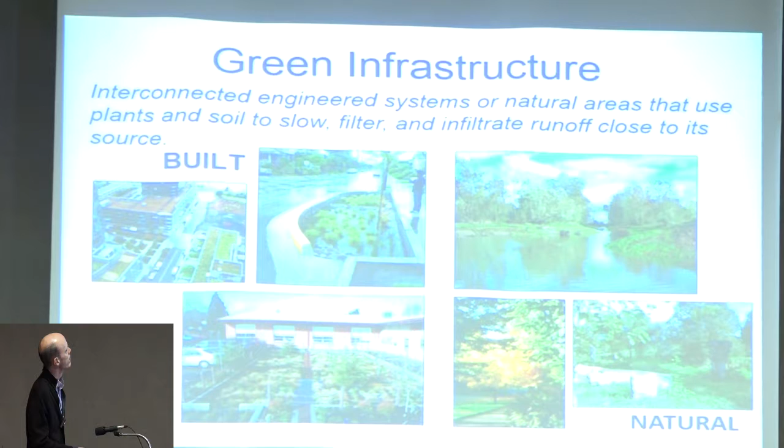Perhaps it's the same for you guys. We talk about green infrastructure partly because we're talking a whole lot more about asset management these days. I think everybody's talking about asset management, and in order to be more transparent with the public, we're listing our assets more. For a long time, we've talked about asset management in terms of our infrastructure, our gray infrastructure at the city, but now we're also bringing green infrastructure into our databases, tracking so-called maintenance needs, performance, and that is a work in progress, but we're doing all that.

And again, we're trying to be a lot more transparent with the public. We've been under, the city of Portland, we've been under a whole lot of scrutiny the last couple of years, and there have been some lawsuits that have really forced us to be more clear with the public about what we've got and what we're doing.

I guess we're a big system. We have 2 wastewater treatment plants, 1,000 miles of sanitary sewer. One thing that's distinctive is we have a whole lot of sumps. We have a huge underground injection permit for in the ground. These are 30-foot vaults in the middle of streets on the east side where the soils drain well, and we have flood deposits. We have a lot of these injection systems. We've been doing that for years. We're actually very lucky that we can do that. It's a very inexpensive way to dispose of stormwater runoff.

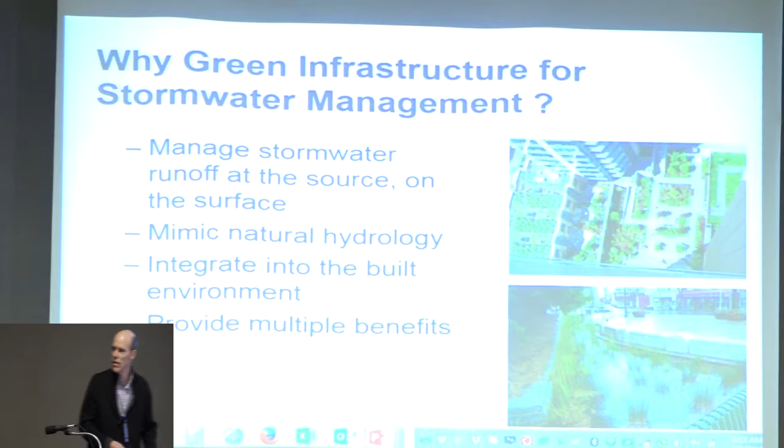Should I just do a page down? What if you do is page down and I'll switch out batteries. Oh, okay, that maybe it's better. Let's see, it's not doing that either. This is fireworks. No, I think you switch between your PowerPoint to your desktop. All of it will show up.

Okay. Thanks. I don't know what you did. What I did.

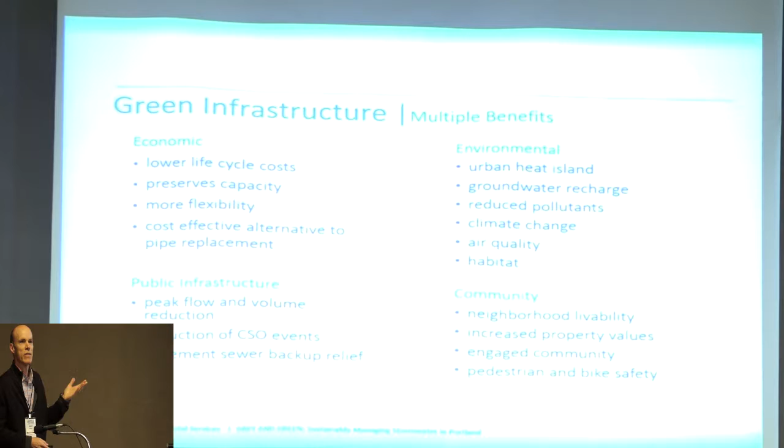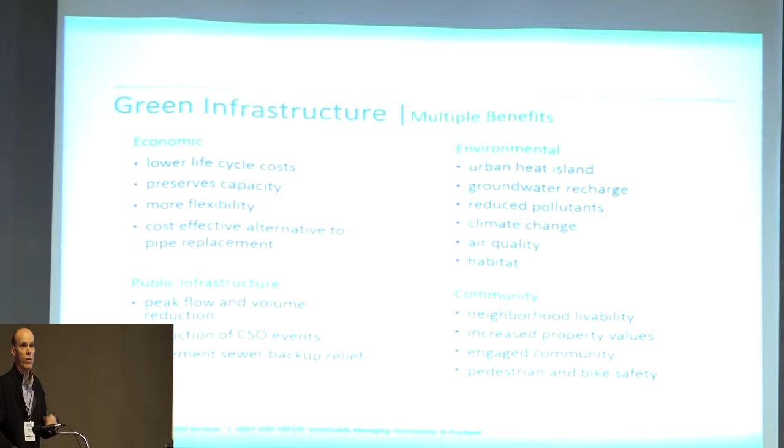So, all the multiple benefits again - there's a whole lot of good reasons to do it, and many of these apply in different cases in different ways. There's a ton of environmental value in addition to economic value. As you'll see, we've used these a lot in Portland to benefit the pipe system, the sewer collection system, extending its life by protecting it from storm surges and avoiding having to dig up pipe that otherwise wouldn't need replacing, by managing the volume going into it.

So are you under consent order to separate the sewers, or are you using green infrastructure to deal with it?

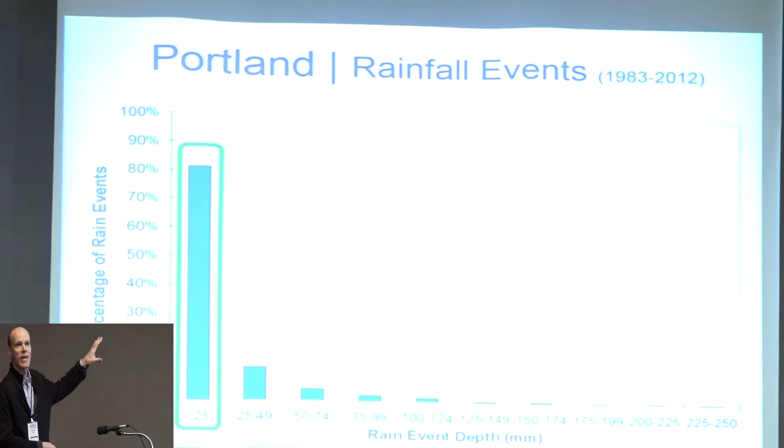So, sorry about that - more millimeters, but we get a lot of really small storm events, low intensity events, mostly in the winter.

So, you guys have crazy big storms, right? I can't imagine what your version of this looks like.

We can't have intense storms, but we have about 32 inches of rain annually, and it varies. We don't get a lot of the teeny tiny storms, but we have a water quality line of 1.25 inches. That's what we try to manage - that's 90% of the rainfall events. Our water quality is 0.84, I think.

So we don't get a whole lot of snow, 8 centimeters a year.

So I think I kind of went through this before. We have 2 treatment plants, 100 pump stations. 42% of the city is served by this old combined sewer system that just got a big upgrade. Operating budget, almost $900 million a year, and I'm one of more than 500 employees - just to give you a sense of how big the utility is. We're a drainage utility, but like other similar utilities, we really push the boundaries.

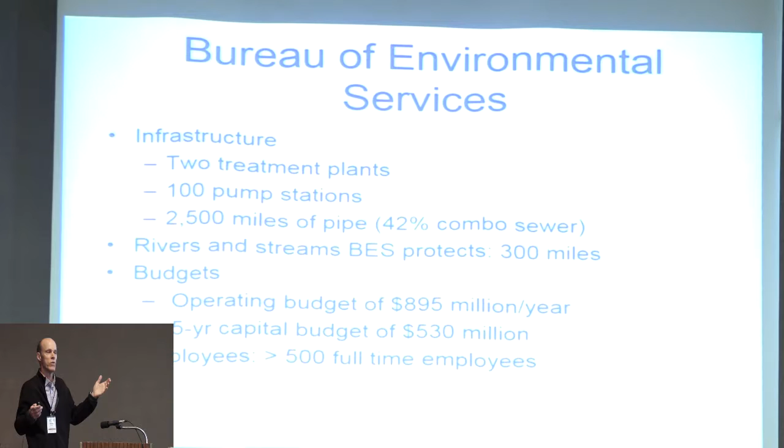In fact, there's been a lawsuit about the scope of our services because the original city charter, which hasn't changed, just refers to us as a drainage utility that handles runoff and sewage. Obviously our scope has changed quite a bit.

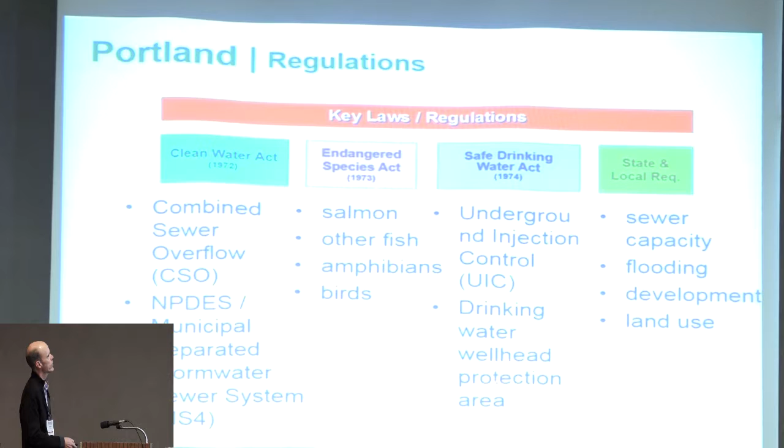List of the regulations we're under - I assume most of these are familiar to you guys. We talked about the combined sewer. Of course, we have an MS4 permit. We have an Endangered Species Act that actually applies within the city of Portland - we have endangered salmon that pass through the city. We have UIC, wellhead protection areas, and then a list of other local and state things.

1991 is when the first legal action came in about the CSO program. Downspout disconnection - I worked on this program. We worked at over 25,000 houses and disconnected over 50,000 downspouts. It was one of the most cost-effective parts of this combined sewer overflow program, getting stormwater out of the sewer system.

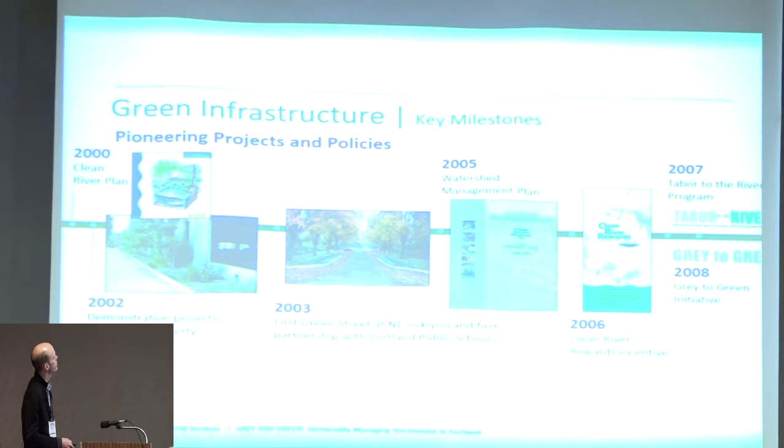We were planned - in 2002, we actually funded, with operating funds, 10 private property retrofit programs. We recruited these projects, we advertised it, we gave people money for managing a certain amount of runoff. I could describe the criteria. We kind of put our money where our mouth was, to learn a lot more about what it would take to do stormwater retrofits, because we'd talked about it for quite a while.

As part of the CSO program, we couldn't just rely on new and redevelopment to get stormwater out of the system. We actually had to work with property owners to retrofit their properties, which is, of course, the most complex, expensive way to do it, to get stormwater management. I'll talk a little more about it.

This was our first Green Street project in 2003 - just 12 years ago, and of course we have over 1,500 of these things now. That's just one version. Watershed Management Plan 2005.

Clean River Rewards, just to talk briefly - we actually have a rate reduction you can get if you manage stormwater on your property. You can get out of a third of the bill, and as you'll see, we have a pretty high bill if you manage all of your runoff on site. That applies to everybody, and 2006 is when that all started.

I'll talk more about the Tabor to the River program. Gray to Green was really a political push by the mayor of the time, who was really interested in this stuff and gave a burst of funding - 5 years of funding for a number of green infrastructure programs. So it was a limited period. These were all programs that were already up and running, and then the mayor got extra funding for all this stuff and just moved it along.

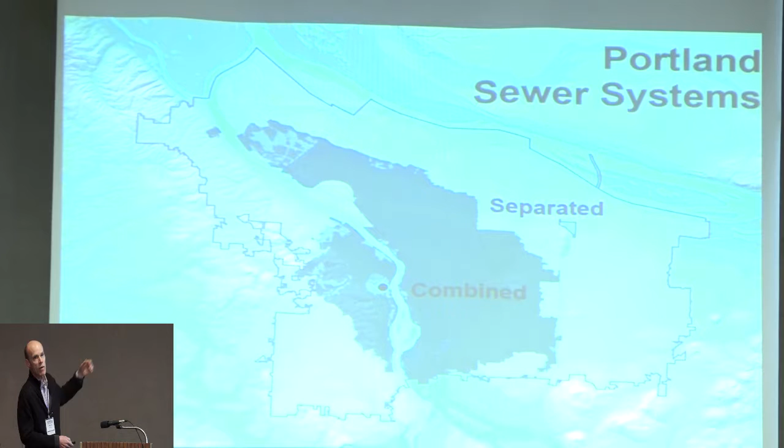There's the combined sewer - you can see, as I said, it covers about 40% of our service area. Just to give you a sense, it's colossal, it's huge.

We have, I think, the biggest pipe - I got to go down in this one time because I won the lottery. It's a 22-foot diameter pipe, and just to give you a sense, the initial modeling showed that this, our biggest pipe, was going to have to be 27 feet in diameter, but it turned out to be too big to get it through the underpinnings of the interstate bridge.

And it was also going to break the bank. It was just going to be too expensive. We couldn't afford it. And so green infrastructure was part of the solution for that, to make that pipe smaller.

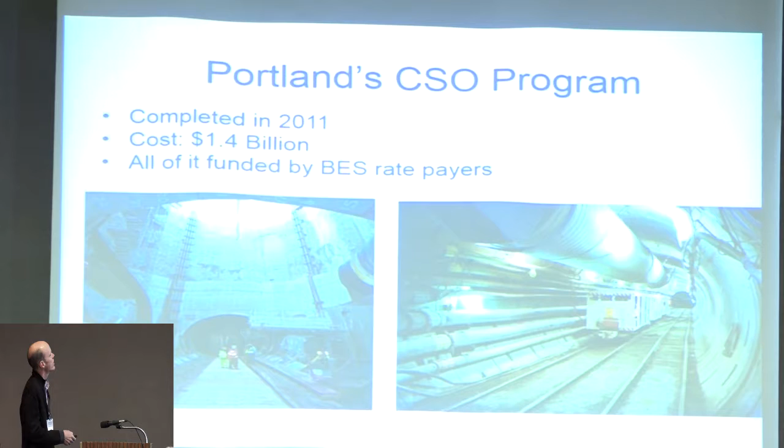So this isn't supposed to be about sewer rates, but I just wanted to acknowledge we're now in the top tier for sewer rates in the country.

And the good news for us, because it's really hard on everybody, and we're very aware of that. We're just happy that there are other cities that are going to pass us on this, because we're really out there, and again, there have been some lawsuits, and I'd say something close to a ratepayers' rebellion, although it didn't quite happen that way.

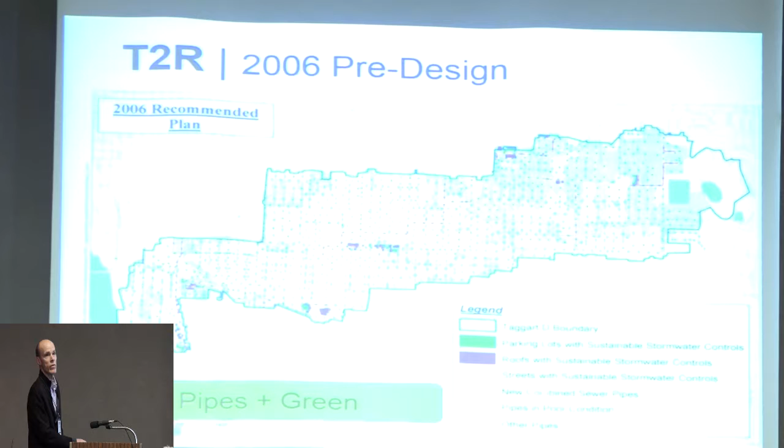So we did a pre-design before 2006, and actually it was all pipe upgrades. It was just pipe work, and it was before the advent of green infrastructure. Instead of just replacing the pipes, which was going to be more expensive, we did a whole bunch of other stuff. We looked at doing more green roofs, green streets. Of course, we replaced some pipe because some of it was in poor condition, or just had to be enlarged, the trunk lines. So we did both gray and green.

So in that area, taking place in phases over about 10 years, we've done about 500 green streets, replaced a whole lot of pipe. We planted, sorry, this is European again, 3,500 street trees went in. We have a private property retrofit group that goes into target areas where it's less expensive to work with the property owners and actually manage runoff from their parking lot, let's say, than to replace the pipe in the street. We've done some invasive removal, native planting, and worked with the public on outreach and education in the parks and such.

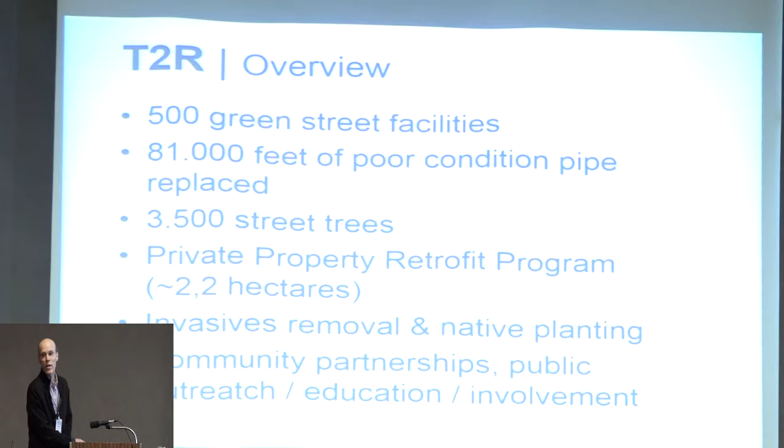So it was really what we call an integrated approach. It was not just about the pipes, but about the green infrastructure in people's neighborhoods. And again, there was a lot of political support for this. It's not something we would have done, say, 10 years before this.

Okay, so here comes the eye candy. We talked about the art of stormwater, of green infrastructure. And so, again, I'm a nuts and bolts guy, but I'm going to show you a whole bunch of pictures to give you a sense of all the different forms that this stuff comes in.

And I think before I start, it's important to talk about landscape design and architecture. My work group, we have done a lot of the prototype projects over the years, the first projects, and helped work out some of the standard designs that were incorporated across the Bureau. There's a much bigger group of engineers that work on these systems across our Bureau. But we have 3 landscape architects in our group, and they've been absolutely essential to all the work that we do.

I'm going to show you a mixture of public and private facilities. Some of them were designed by us. For instance, these green roofs are mostly private.

But I don't know, do you guys have many green roofs? Have you guys experimented with them? Yes, actually, for Iowa, we have probably about 10 or 12, if not more than that. Yeah, maybe 15. Yeah. Great.

So I haven't worked on these kinds of projects, but they're great as far as stormwater management. I think it's interesting because we don't have much in the way of specifications for them, and we're trying to develop them to establish a minimum stormwater management standard. Will the roof hold 1 inch of water or 2 inches? Because we have a lot of proprietary material going in.

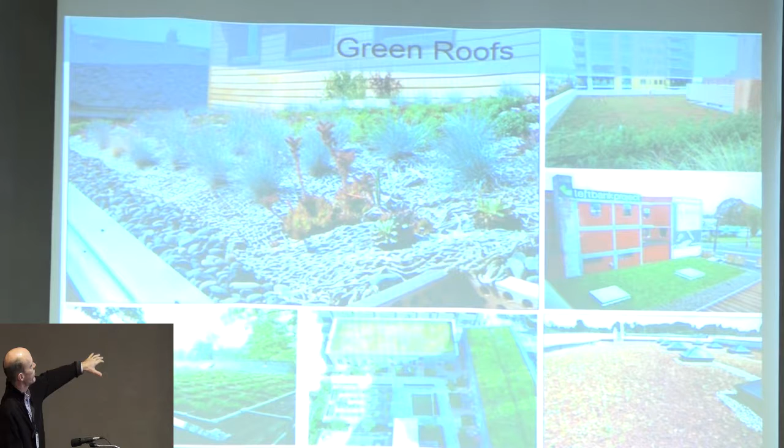This is a residential one on somebody's house. This one is sort of more of an example. We have some areas of the city that were rehabilitated. They were old brownfields, and really high density housing was put in. We've had a lot of increase in population.

My parents live in one of these, and you can look down and there are green roofs all over the place. And the city rules say if you put in for a high rise, you can build that high rise higher if you manage your runoff with green roofs. So there's an incentive that way.

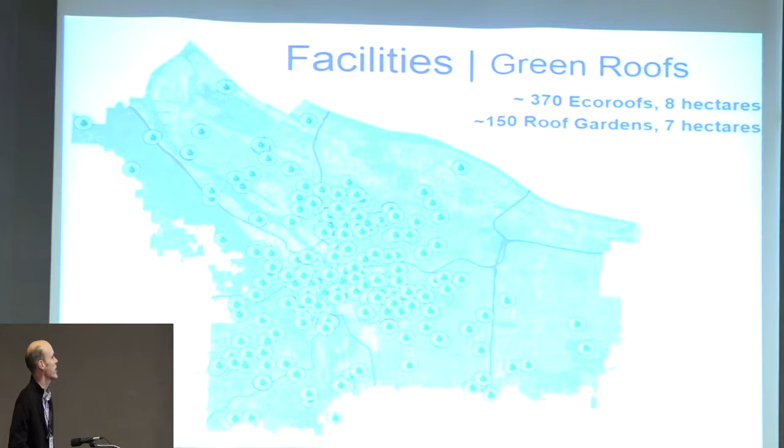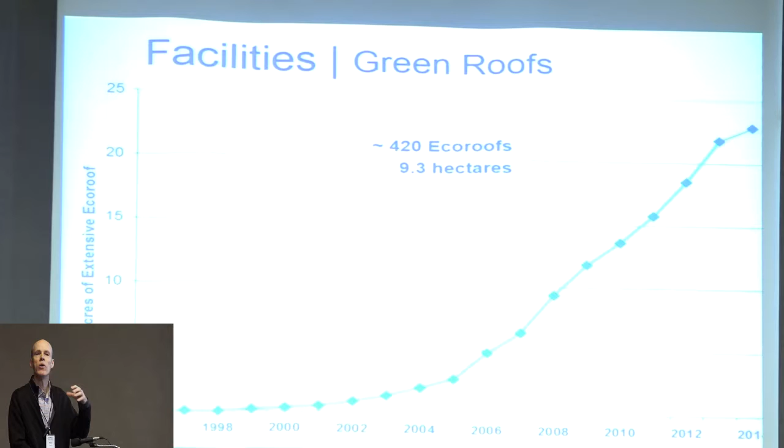We provided people $5 per square foot of roof area that they manage, and that project just ended. It ended a little bit early because the politics changed. But it did result in a whole lot more of these green roofs getting built. The whole idea was to build awareness and to build the professional community that designs and builds these things, and I think it achieved that as far as building the industry.

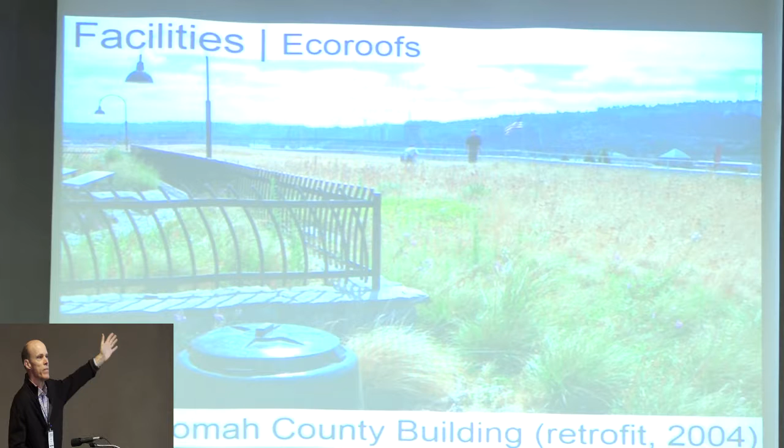So this is a really deluxe version of a green roof. It's thicker, it actually has some contours in it, and it's got this beautiful overlook where people can come eat lunch there.

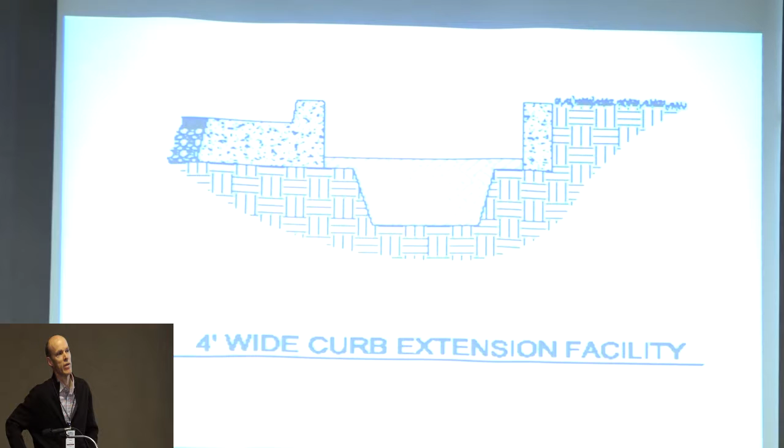That's a good question. We would love to insist that they not have irrigation systems, in terms of not requiring summer watering, but I think in fact most of them do. Most designers aren't willing to let their systems sit out there and fry for, say, an eight-week dry period. And I think there's a lot being learned, as is true for all this stuff, about what plants, native or not, we use what works. We used to always say native only, but it became clear early on that natives don't necessarily survive in any of this stuff.

These aren't natural settings, but we use a lot of natives. Experimentation is huge, and that includes what's on them. The most common species used are sedums.

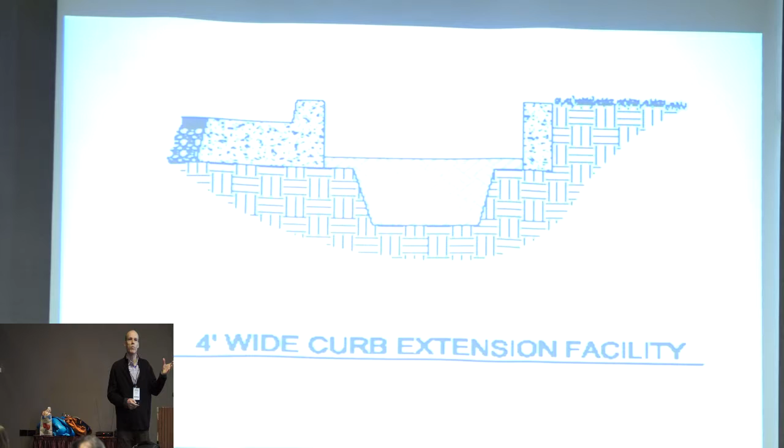There's a lot of detail with that. We often use our latest version for the ones we spec for the City of Portland. We actually have a rule: all our new pump stations have green roofs, meaning 5 of them so far. We use red lava rock, which we happen to have from the volcanoes nearby, along with sedum. The sedum seem to love to colonize on these gravel layers on the roof.

Shifting now to talking about these green systems in the street, I want to give you a sense of the cross section. Here's the curb, here's the street, and then here's the edge, say a planting strip here. As I mentioned, we typically pond 6 to 9 inches of water on top of the surface, and then we bring in 18 inches of modified sandy soil that has a lot of compost in it.

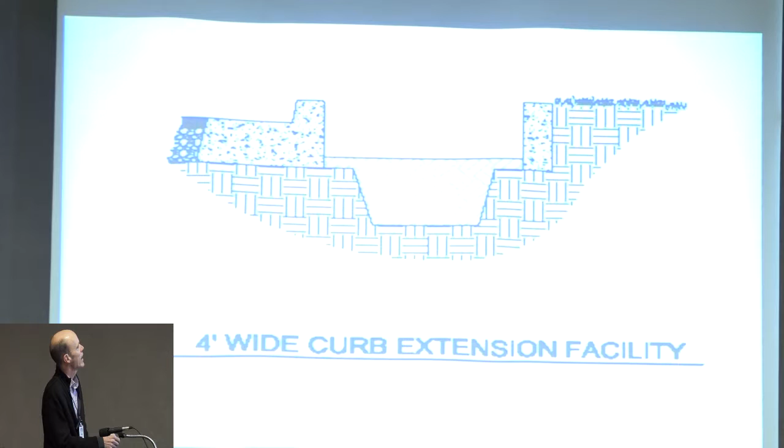In this case, it's just sitting on top of the native soil. Most of the facilities we build don't have any gravel underneath them, although that's done in some cases where more capacity is needed. There might be an overflow pipe that stands here, connecting with a gravel layer down below. But we typically like to keep it as simple as possible in terms of complexity and cost. So this is the kind of cross section we have.

We really don't do many V-shaped swales anymore for water quality. We're trying to impound and capture as much water as possible, so we do flat bottom versions of these today, again with multiple compartments.

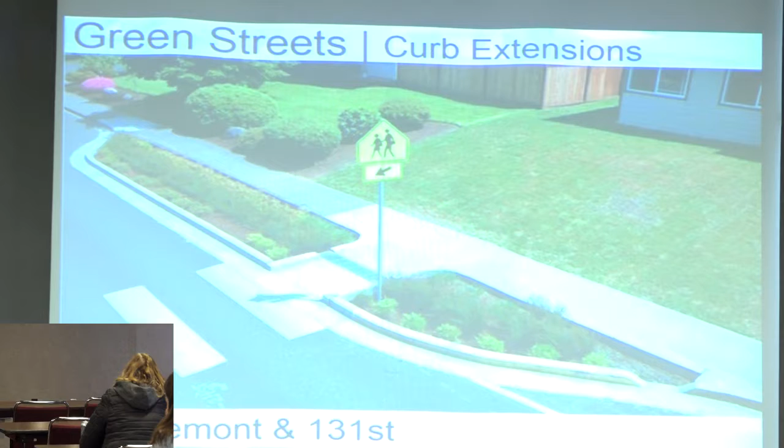How supportive are the street maintenance crews of these streets? Don't you have a lot more maintenance and cleaning out of debris, shrubs, and material? There's a learning curve, I'm sure. Yes, and I have a whole section on that. So, sorry, I should move quicker. I'm belaboring this - here's another version.

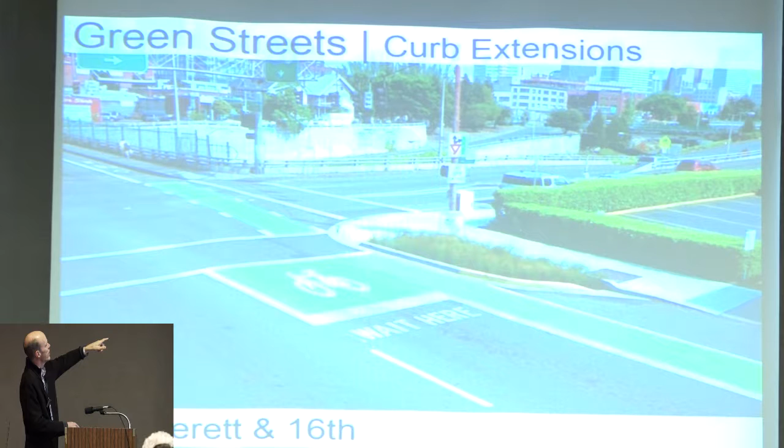We have various accommodations for cyclists. There's a lot of cycling in Portland. Here's a case that worked with a green street and a cycle track that worked well.

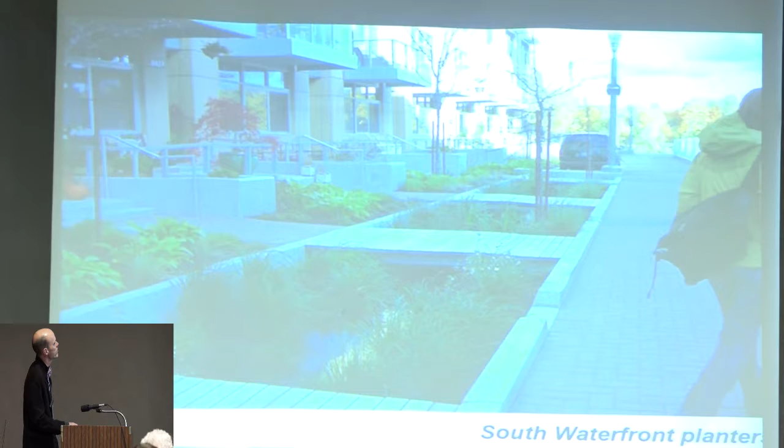Is there subsurface drainage with the swale, or is that all infiltration? It just depends on what the underlying soils do. If they don't drain well, we add drainage. We even have some that have liners in them if we're on top of contaminated soil or high groundwater — that will have a drainage system at the bottom, using a plastic or HDPE liner. As a utility, we'd really rather not build those. It's still a fairly new technology. You've got liner attachments up on the concrete walls, an under drain, and our engineers are really concerned about what happens down the road 10 or 20 years, the cost of replacing those and how they perform.

Can you talk a bit about pre-treatment — what you guys do, what works, what doesn't work, as far as the water coming into these facilities? That's a good question.

It really varies depending on what kind of street you're working with, as to how much sediment gets delivered into these things. We've learned the hard way — you can see this entrance here, I think it's one of our older designs. There's typically a concrete pad at the entrance that's flat, which allows sediment to accumulate, and workers can come in with a flat-edge shovel and scoop the stuff off. There are usually plants, these pretty rigid rushes, that limit the sediment from moving into the system.

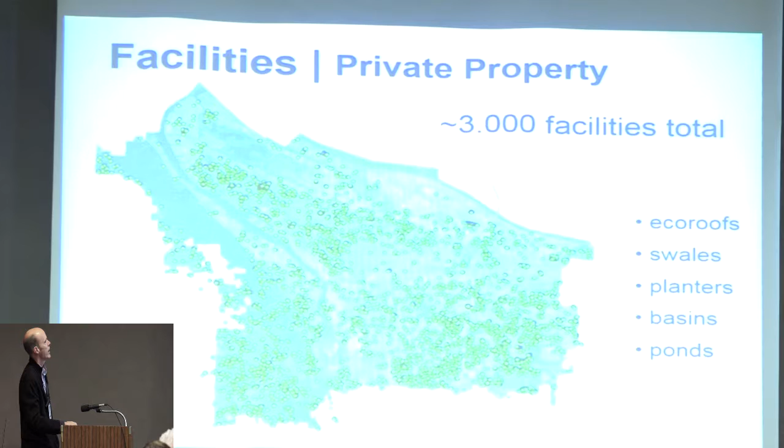So just quickly, we have a lot of stormwater facilities on private property. This is a download from our database — it's not just green, well, I guess this is all green actually — but we have a whole lot of soakage trenches and dry wells in the city of Portland, particularly on the east side, and they're still in use. I'm just highlighting the green infrastructure parts of it.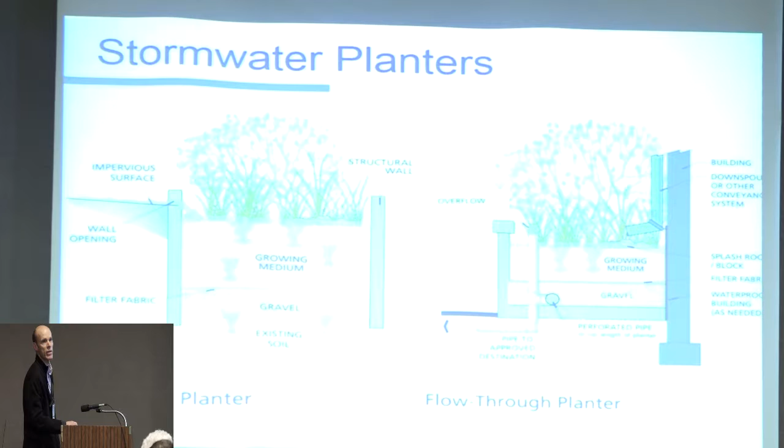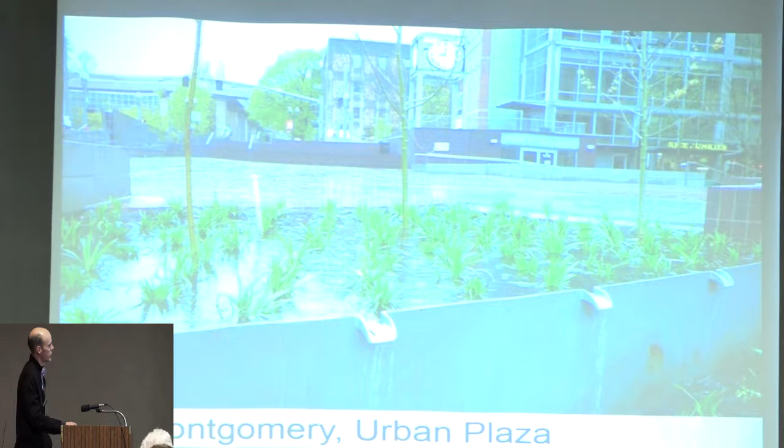This is Portland — some of the cooler green stormwater management design where it's been fitted in. This is just up the street in downtown Portland, there's our streetcar, and this is the same facility that has a lot of interesting metal work with it. This is really the art part, I think, incorporated in a public plaza. These are other sections of it.

They have trees in them. Here's another part of the campus, and these areas are kind of depressed relative to this surface that contributes water into it. I think one of the things to be skeptical about is knowing where the water is moving, getting it right topographically. I suspect that some of the water hits some of these units much harder than others. There are no runnels or trench grates bringing water in. It's a neat system, and I think it works fairly well for what it is.

Trench drain connecting two parts of a swale system. Planters incorporated in an attractive way — again, this is up at Portland State University. This is a trench drain bringing water from a building that's right to the right there.

This is a stormwater retrofit I worked on, a sewer backup relief project. The school connects to the combined sewer system, and instead of digging up the sewer pipe in the street to fix the problem, which would have been a lot more expensive, we incorporated stormwater systems on site.

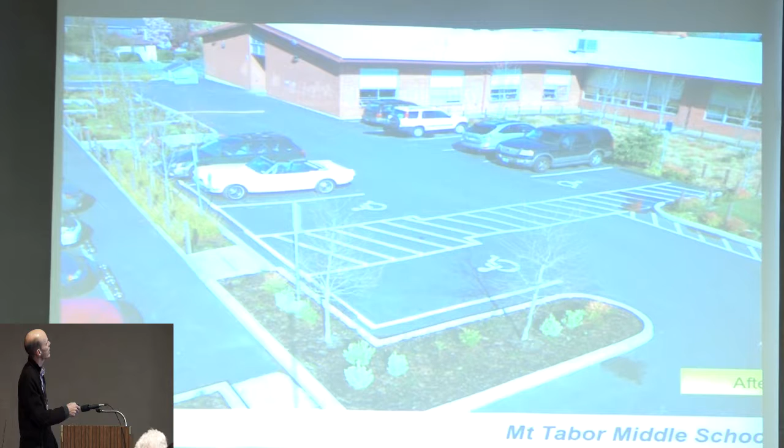This is what it looks like now. There's a large rain garden here, and then we put in this landscape. These are stormwater planters here that take runoff, and there's the rain garden itself up against the school.

The stars kind of aligned for this project as far as having enough real estate. This was a parking lot, and we were able to take this space and actually preserve most of the parking spaces for the school because the striping had been so inefficient. There was room to do this kind of stuff. Huge value to the school as far as the trees providing shade for a southern exposure. It was an amazing project to work on because all this stuff aligned itself and it worked out really well.

We spent about $500,000 retrofitting the school, and there's more to it than what you've seen here. That was substantially cheaper than digging up the public sewer in the street and replacing it.

We do some pavers, but we're really not a leader in this regard. We focused a lot on green stormwater management. I think a lot of people would include pavers and pervious asphalt as green infrastructure, but the state of Washington has done a lot more on this, and I think we're going to do more in the future. It was kind of a policy decision. Our chief engineers were really hesitant to jump into pervious asphalt and concrete in the streets, so we haven't done a lot of it.

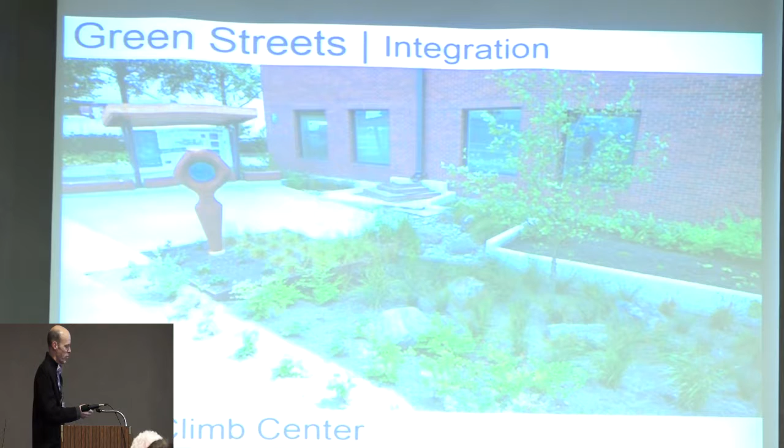This is another public entity, Portland Community College. You can't see it, but the street is right over here, and this system is taking roof runoff. There's a downspout right there, taking roof runoff and street runoff. Right now it's pretty complicated as far as legal agreements. You've got long-term maintenance to address and who's going to fix it if there's an issue, but there's a lot of value to it.

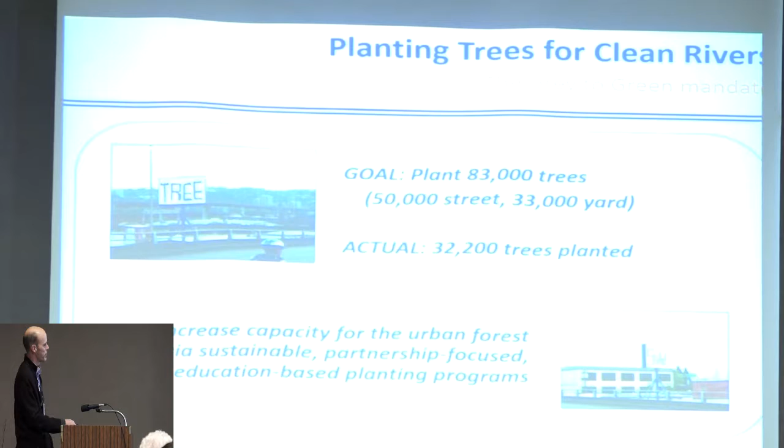Not to go into too much detail, but as part of the mayor's push, the goal was to plant 83,000 trees. The group actually got, I think it's gone up to almost 35,000. And a lot of the benefit, I think, was going door to door. We had canvassers going door to door, talking to people about the benefits of trees.

I forgot to mention an important detail, which is in the city of Portland, the city doesn't own the street trees, the trees that are along the street. The property owners actually own those trees. And so it requires, if the city's going to plant a tree along the street, it actually requires a conversation and an agreement with the property owner.

Is that the case in Iowa, that street trees are owned by the property owners? It's all the city? Yeah.

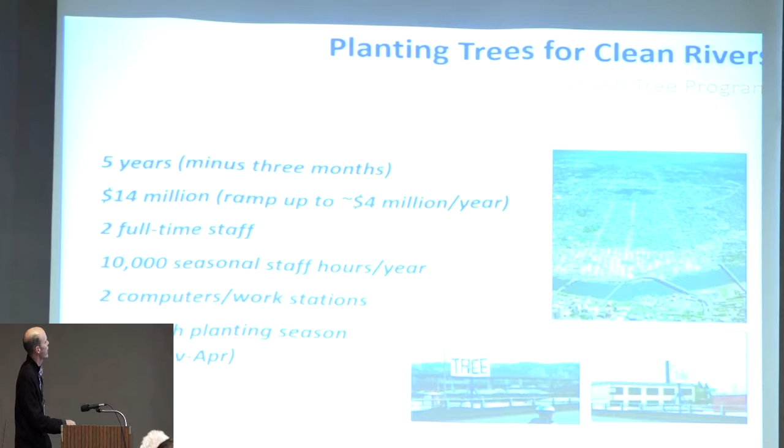So anyway, hence the extreme outreach that's gone on with this idea. So you can see some of that. We have 2 full-time staff, but a lot of seasonal staff. And this project continues even though the funding from the mayor has diminished substantially. And they're planting not just along streets, but they're planting open spaces. This is a junction with a major artery and some of the bigger open spaces. So lots of new trees in Portland.

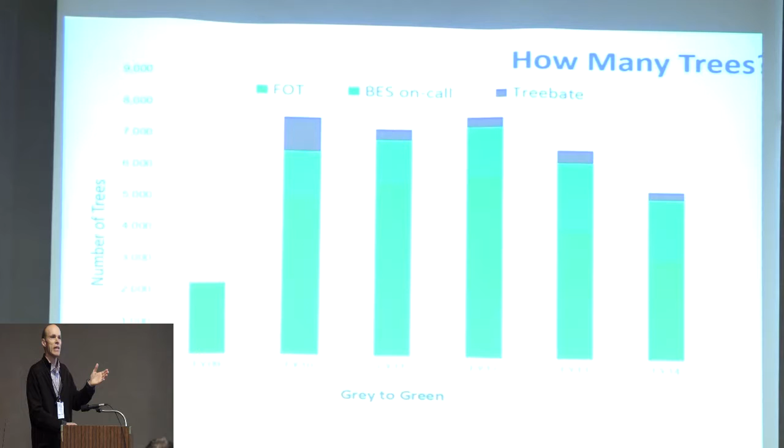So you can see the thousands of trees that have been planted. Forgot to mention, Treebate is a small addition, but our stormwater and sewer utility will give you a rebate or reduction on that big bill that I showed you if you plant a tree. And it's depending on how big the tree is. So it's linked to the size of the canopy and the estimated future stormwater benefit that it's going to provide. It's the blue part, top part of the bars here, and it's almost a symbolic gesture, but it gets outreach people talking to residents about the benefits of trees and the fact that they can get a rate reduction. So it doesn't provide huge numbers as far as tree plantings, but it's considered to be an important program.

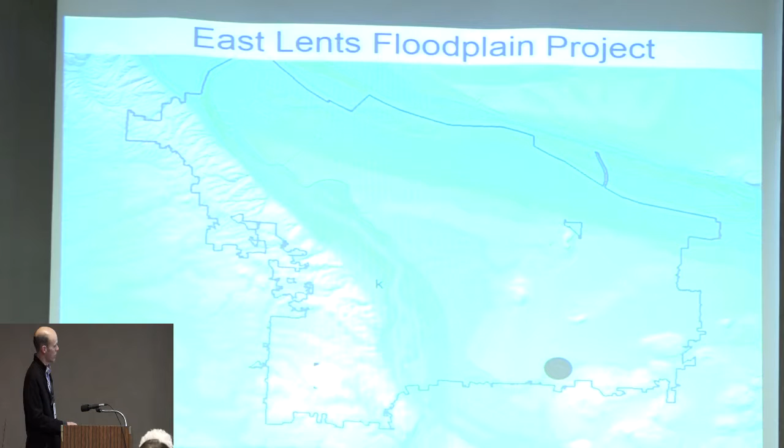Okay, so now for something completely different, quickly, we do have floodplain projects, and our most famous one is this one in East Lents. I imagine you guys do projects like this where you've got this waterway, it's a creek in eastern Portland that the Army Corps of Engineers armored the creek, straightened it and armored it in the 20s. And that worked in many ways, but for decades and decades there's been flooding. And the city has actually had a program to get affected property owners out of the floodplain, to expand and recontour the floodplains, to provide flood storage, but also provide better habitat for fish and benthic organisms. And it's been a project that's gone on over decades and decades.

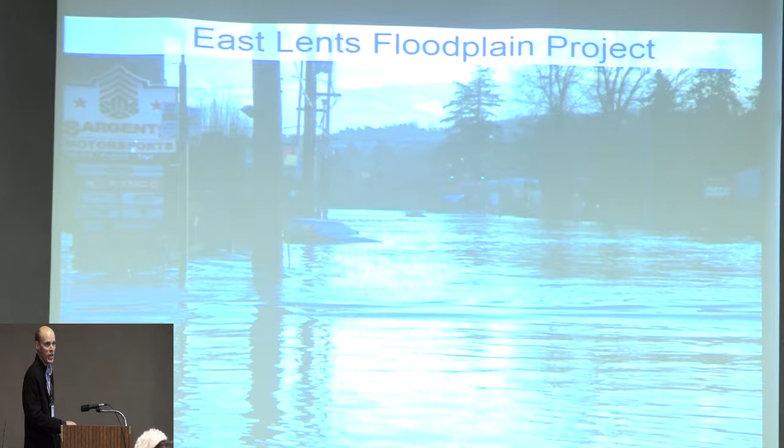So this is one of our roads in Southeast that's right next to the creek. I think you guys are famous for flooding, aren't you, in the last few years? What it used to be.

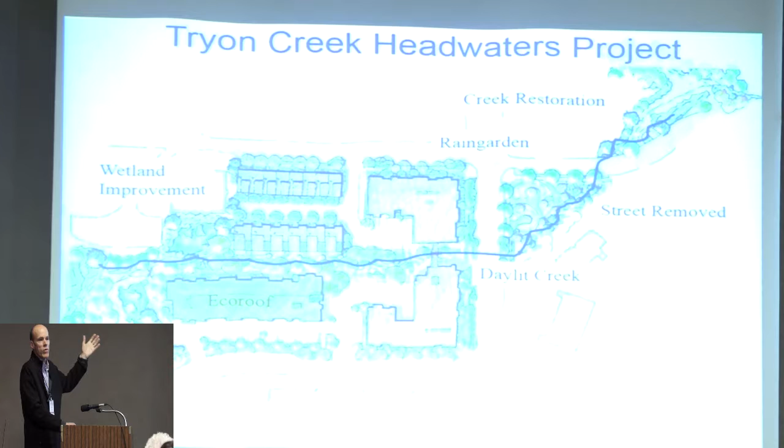These are marketed as kind of environmentally friendly units. So here's what it looks like, and the creek runs right through here. And it runs through here and goes under the road and then comes out here. And here's the rain garden I talked about that's owned and maintained by my bureau. Oh, there's the creek.

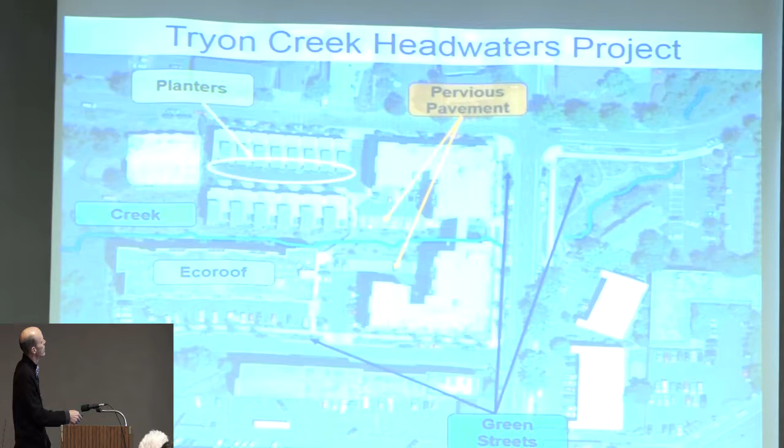Here's what that space looks like with the creek between the buildings. So it's a really attractive thing. Lots of lessons learned about how to deal with the creek. I think they put a ton of gravel underneath the creek bed, so actually some times of year you can't see the creek. Again, lots of lessons to learn about how to do this stuff, particularly adjacent to buildings and the safety concerns with that.

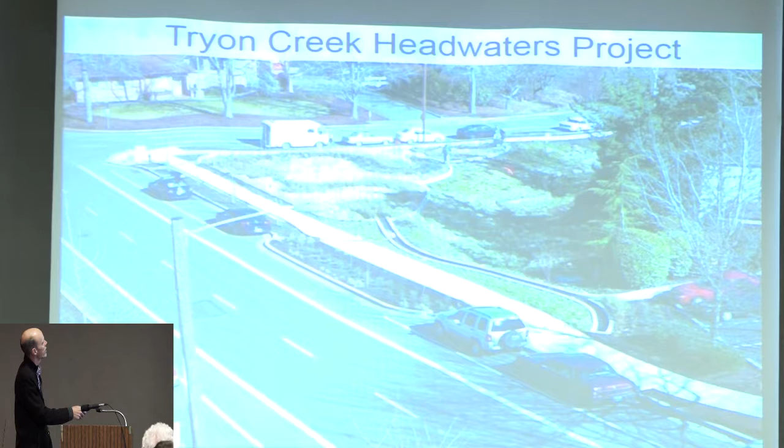And I'm not a modeler, but we have a model now as of 15 years ago. It's called an explicit model. It actually hooks up every single impervious area. It doesn't generalize, or it doesn't generalize as far as taking a whole block and estimating percentages of impervious area. Every parking lot, every roof has a direct connection to the sewer system.

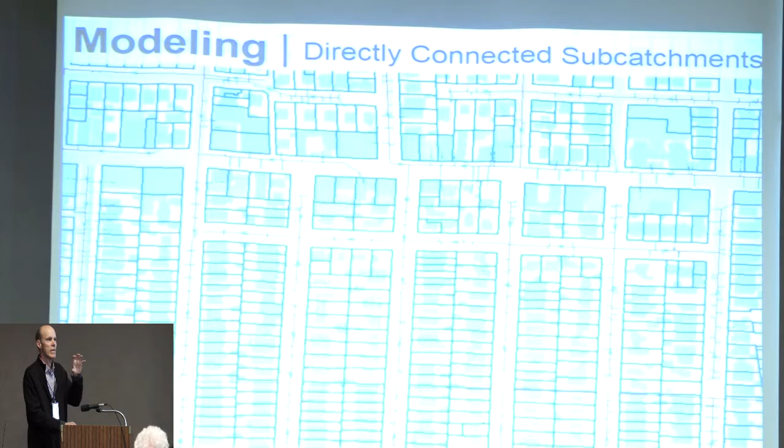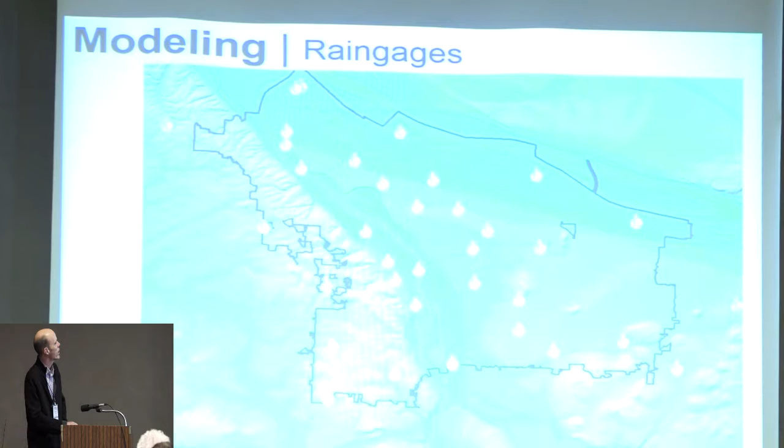So the quantity of water and the timing of the entry of that water into the sewer system is explicitly modeled. It took a huge effort to put the model in place, but it's really the underpinning for all these projects, because we can point to an existing parking lot and say we know exactly how much trouble the runoff is providing for our sewer system. So the model was a huge investment by the city. It was part of that CSO program that cost so much money. We have rain gauges all over the city that we use.

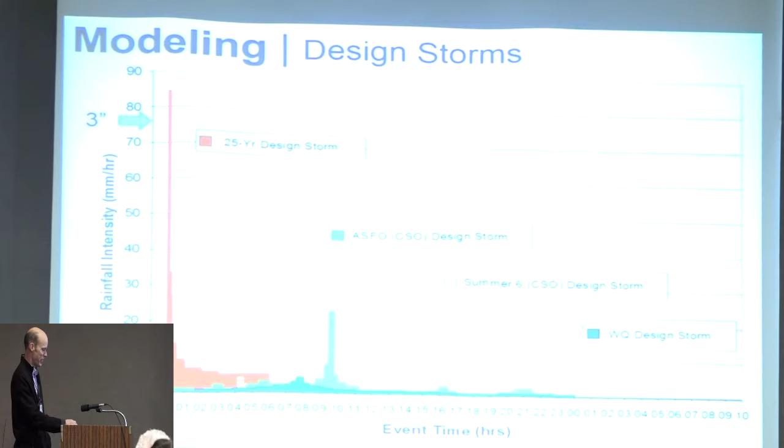We've got a very fancy modeling system that shows us where we need to manage runoff for the old combined sewer system. Here's our monitoring. We do monitor these things. It's very expensive. We basically put ourselves in a position of having to do some monitoring to show that this stuff works, and it's been fun to work on. I sit next to the engineer who's in charge of this stuff - it's really fun to work on.

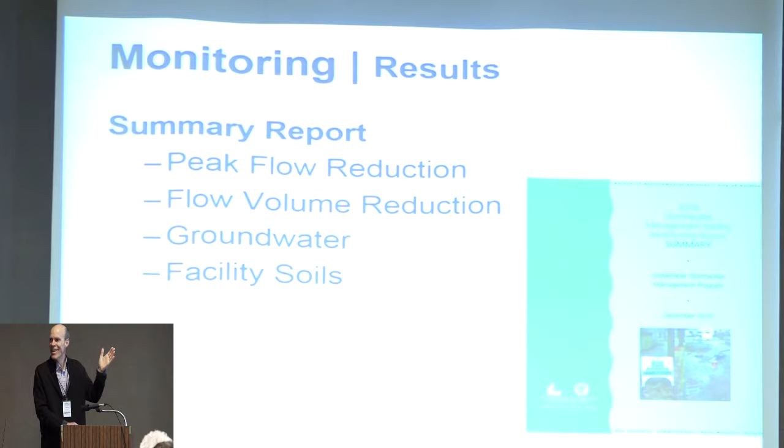It's also true that a lot of places around the country, like Seattle - I think there's a hotbed in Wisconsin, and Maryland is certainly a hotbed for bioretention and green infrastructure - see consortiums of academia, the federal government, local government, and other partners. We've sort of been all alone, and it takes some big bucks to do this kind of research. So we pay a lot of attention to Washington State - they have a stormwater research center, and the state has provided substantial sums of money to Washington State to do related research. We've done some of the homework we absolutely had to do because we were doing some of this stuff first. I don't know if ISU is the leader for you guys, but we definitely turn to other organizations for help.

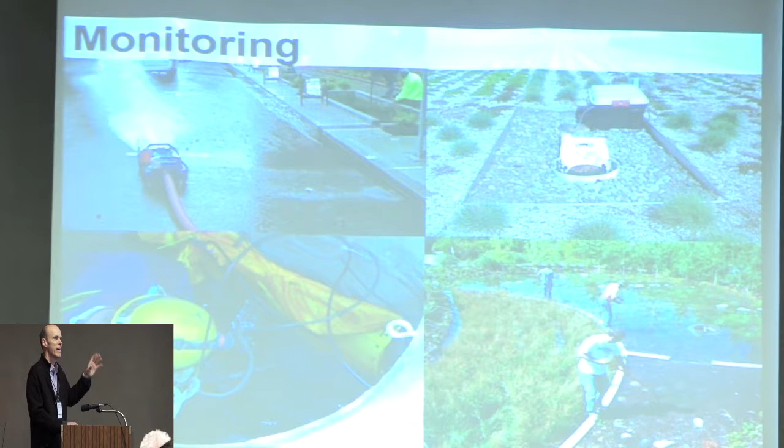One of the things we do - we sometimes open up a hydrant and actually mimic a storm, because it's so hard to make sense when a real storm is going. Here's a green street getting dosed with water, and we're producing a hydrograph and watching the outflows from it. Here's a green roof with a monitoring system - we're monitoring outflows. Here's someone down in a sewer manhole installing a continuous monitoring system, which is really the most expensive, to put a meter in a sewer line. I think we spend about $8,000 a year for that, to meter outflows. And this is a big rain garden we're monitoring in one of those synthetic storms.

Again, one of our flow tests on the right. And then we've done some soil testing. These imported soils are so important in so many ways to the functioning of these facilities. One of the big issues is how fast they infiltrate - sometimes it's your underlying native soils that govern the infiltration rate. But we continue to do soil tests.

Again, our soil is about 30% yard debris compost. We have a lot of yard debris because it's so wet in Portland - there's a steady supply of yard debris compost. It's fairly low in nutrients, though there's some nutrients. The soil mix is a third that by volume, and then about 2/3 sand - we have plenty of dredge sand from our rivers. And then about 10% fines, so a touch of real soil.

There's lots of ongoing research for us and in Washington State about these soils. There's some concern about export of nutrients, because they do export nutrients, and also those infiltration rates. We found that our imported soil drains much faster than the 2 inches per hour we'd assumed - often it's tens of inches per hour, even after years in place.

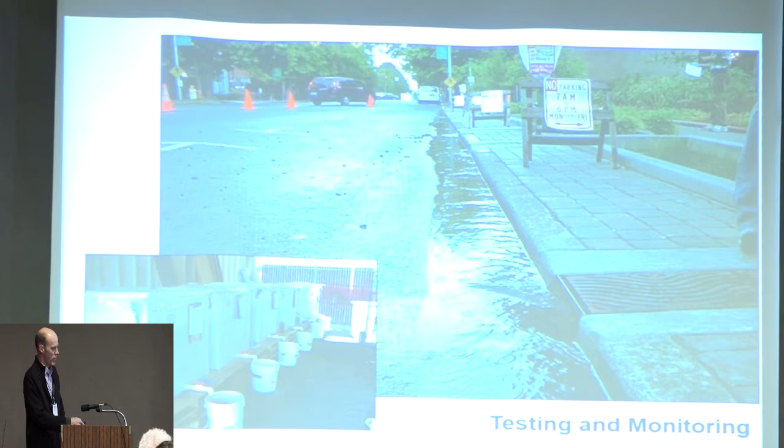For our ground level green infrastructure that infiltrates, early concerns were with clogging, and we really haven't seen a lot of that, which is kind of amazing. Years ago, people we talked to - most of the comments were related to sand filters, and these systems were considered most related to sand filters, so they were concerned about clogging. We haven't seen that very much. I think one of our concerns is actually infiltration that's too high, or much higher than the original design. So there's the rain garden and some of the data that's come out.

So here are the storms graphed on this right axis in millimeters, and then these are discharges coming out of the bottom, the volume per second coming out. So about a half a cubic foot per second.

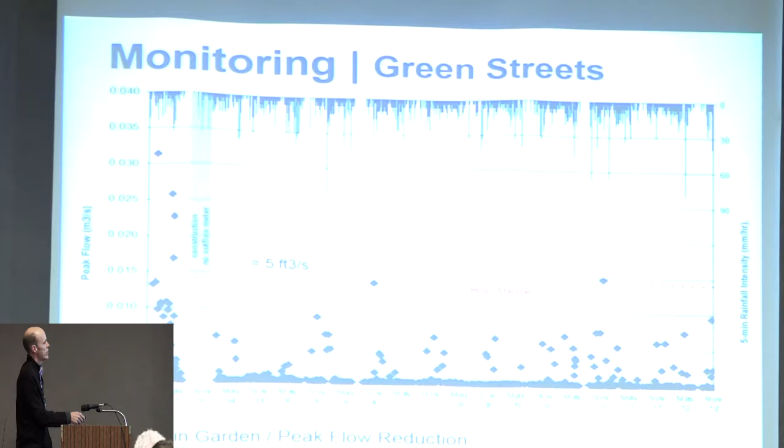So the facility was built here, finished in November 2003, and you can see these exceedances. These were storms that were putting houses downstream at risk of sewer backups. Then the thing was built, and mostly we've been on track, meeting the design standard. We did just have to clean this out, the forebay, a couple of years ago because of debris in it.

Here's another thing. You can see the peaks of the storm coming through in the lighter color, and this is the actual discharge before the facility was built. You can see how much smaller the peaks are now, and we've documented a volume reduction of 86% over the course of a year. That means this water is not going into our combined sewer system; we don't have to pump or treat it. This facility was built to manage storm peaks and protect people from sewer backups, but it's also giving us the benefit of keeping this water out of the sewer system full time.

We've done monitoring of what we call eco roofs, often trying to convert to green roofs, but eco roofs is what we call green roofs in Portland, and this is one of our test setups. You can see just a dramatic reduction. It's remarkable how much our green roofs have been shown to flatten the peaks of storms.

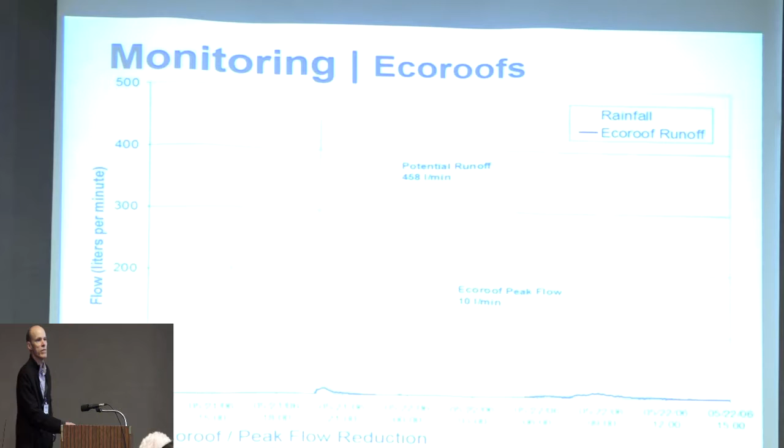Again, in light color, the actual rainfall, and then metered runoff. They aren't as good at volume reduction, but I think it varies enormously year to year and season to season depending on the timing of the rainfall and the temperatures. So it can really vary year to year how well they perform as far as the retention they provide.

Okay, operations and maintenance, we're finally there. We actually have a division of our organization devoted to this—it's not in parks or somewhere else, it's part of our sewer and stormwater utility. Their job is nothing but to go out and maintain facilities. I just got this slide set from them. They get asked all the time what it costs to maintain our green facilities, by people all over the country. Everybody wants to know. They have a lot of green streets, and also a number of regional stormwater facilities that are kind of natural areas. This one looks just like a parcel in a development of some sort.

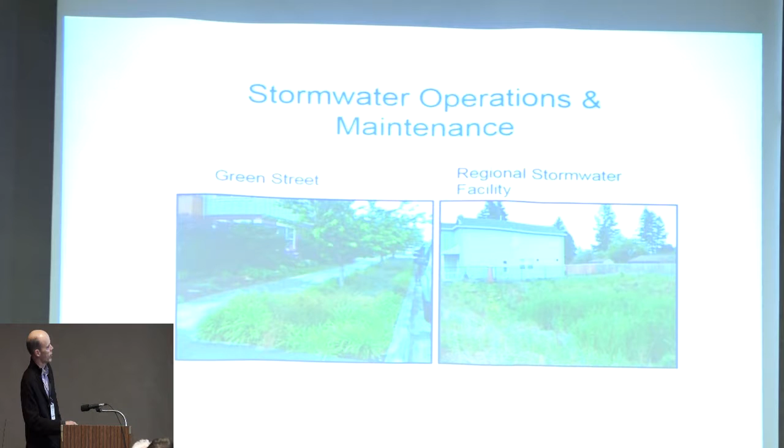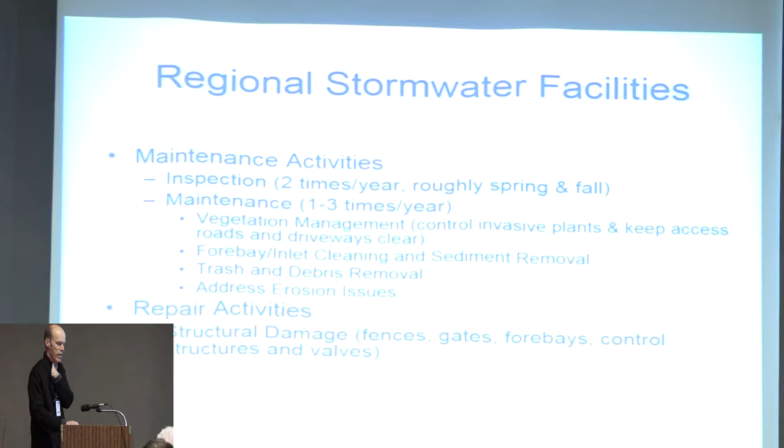So for the regional stormwater facilities, not the green streets, here's what they gave me. Looks like they check on them a couple of times a year, and do maintenance one to three times a year. They do what you'd expect: controlling invasives, cleaning forebays and inlets, trash and debris, erosion control. They also have some structural things, some walls and fences to repair.

They have 135 sites, total of 130 acres, and they are about $2,000 per acre managed. They do have some of our staff helping with maintenance, but a lot of it's by contractors, which is true of the green streets as well. So it's very cost favorable to use contractors, and we let a lot of contracts for this kind of work.

So the city is making a really significant investment in this, and the head of the management group who works down the hall from me—this is relatively new to his portfolio. He's in charge of all the maintenance for our network of pipes and pump stations and everything else, and this green thing is a new part of his portfolio and a real question mark. So a lot of questions for everybody about what maintaining this stuff is costing.

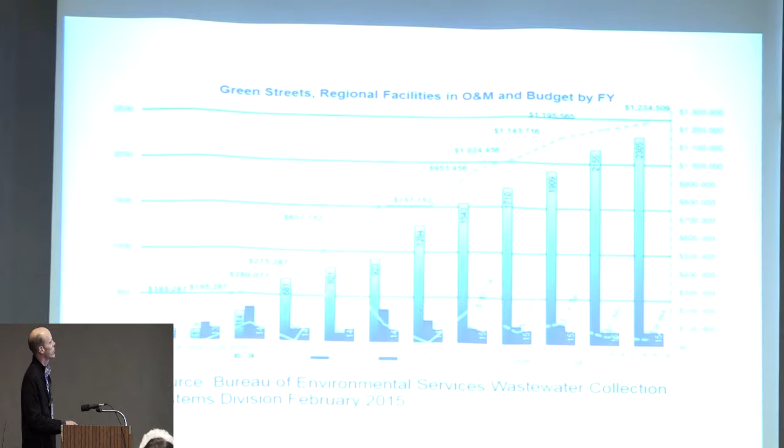Before I forget, we have a central database that has all of our gray assets in it, and all of these green assets. Key to the whole idea, all these green assets are also being managed into this database now, which is a huge amount of effort, but essential to any discussion of managing these as assets. And even getting them into the database is years in the making. It's taking a long time to do, and there are lots of questions about what you put in that database.

What is it that you monitor? Obviously you're monitoring the number of visits per year, the kind of work that's done, but what do you put in the database as far as the infrastructure itself? You want to know, for instance, for the green streets, whether it has sub-drains, if it has trees in it, does it have check dams? We had a lot of conversations about how to adequately document these new green assets for database purposes.

So this is just about the fact that there's a big database that the data is being put in, and we've invested a lot in producing a database that's easy for the staff to interface with in the field.

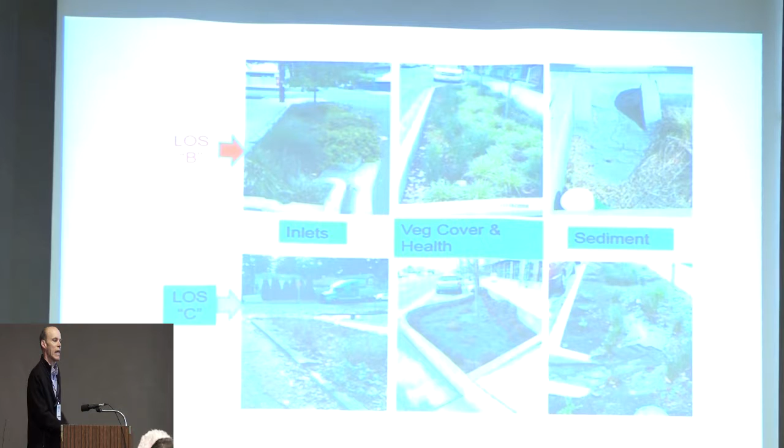And I think we're all waiting, we all have experience with green assets or green infrastructure as far as visiting these facilities, seeing things like this, but we're all waiting for the big download from that new database, which might be in a year or so. They will have spent years setting up that database and collecting data, and then they can run those queries and see whether we've got disproportionate charges coming from certain facilities or certain kinds of facilities. Are 50% of our maintenance dollars for green streets coming from, say, 25% of the facilities, and what about that? These data systems are just essential once you get enough of this stuff in the ground.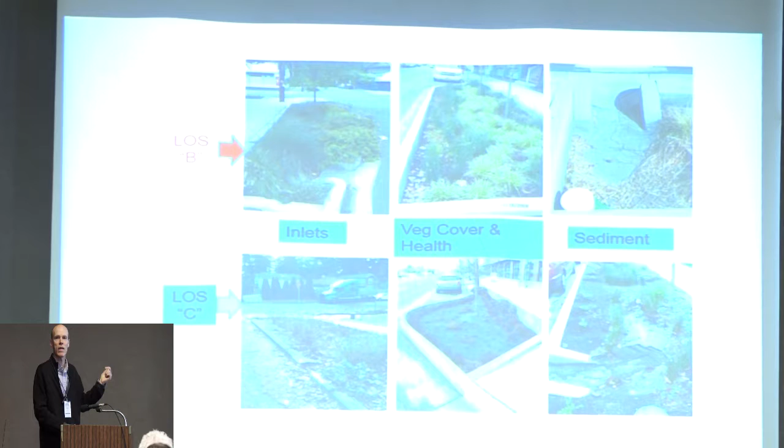So as far as green streets, the maintenance that we do there, we do have staff that are out there mostly doing inspections and writing the maintenance work orders. They're stopping by, looking in on the facility. They inspect contractor work. Our staff are also entering maintenance costs into the database, and importantly, our staff are also the ones responding to public inquiries that come in, talking to property owners next to the facilities if need be. Contractors do most of the work itself.

So an important distinction: what's done in the first 2 years before long-term maintenance. 2 years of so-called startup or warranty maintenance is part of capital construction work. For 2 years after construction, the plantings get watered, and that's the most important element of the whole thing, as well as weeding as needed.

We typically plant, at least in the green streets that we build—private developers also build green streets—but we typically use gallon plants in these facilities, planted about 12 or 18 inches on center. So we get kind of an instant landscape, and it's expensive. The public likes it, and most importantly, it reduces maintenance costs initially because we get much more cover more quickly. We have to push on developers with that because they want to plant smaller plants for good reason, but again, we find reduced maintenance costs.

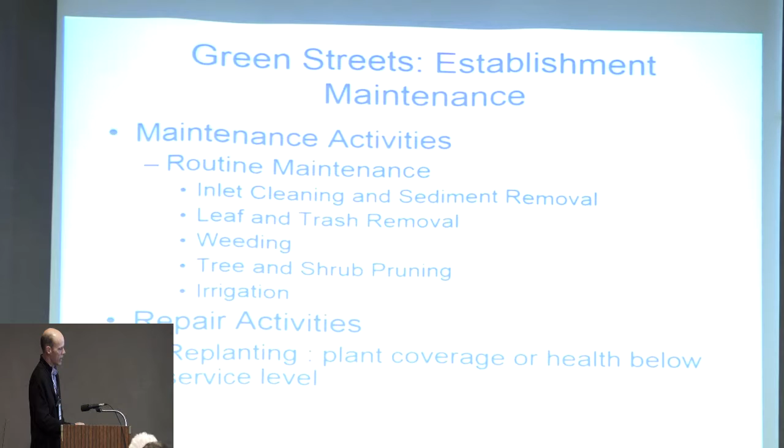Irrigation, I can't emphasize that enough, because we have this summer drought period, and we definitely will lose plants if we aren't irrigating about every 2 weeks during July and August.

So this is about long-term maintenance. After the 2-year mark, all of these facilities, whether built by a private developer or by us, are put into the long-term maintenance program. And that's where this database we're building really comes in.

Again, these facilities are typically visited 3 or 4 times a year for maintenance activities. On a regular basis, people are cleaning out the inlets, removing leaf and trash, doing weeding, and periodically doing some pruning. Unfortunately, we do have some facilities in the long-term maintenance program that need more.

Last summer we had a really long, hot, dry summer, and we had to run out and irrigate some facilities. I don't know what percentage it was, but much better to irrigate than to lose the plants—that would be a much more expensive proposition.

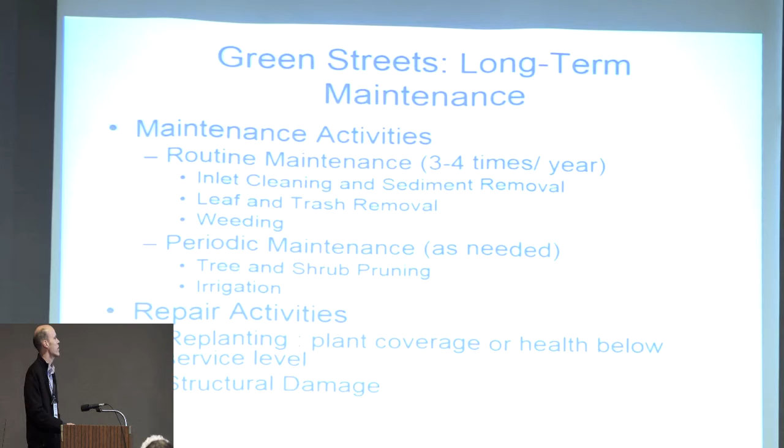We do very little replanting; it's horrendously expensive. And we do get some structural damage—damage to check dams and walls—but that hasn't been significant to date. So here's the expensive watering that goes on during the warranty period, actually hiring someone to come out with a truck. Our negotiations with the contractors become really important.

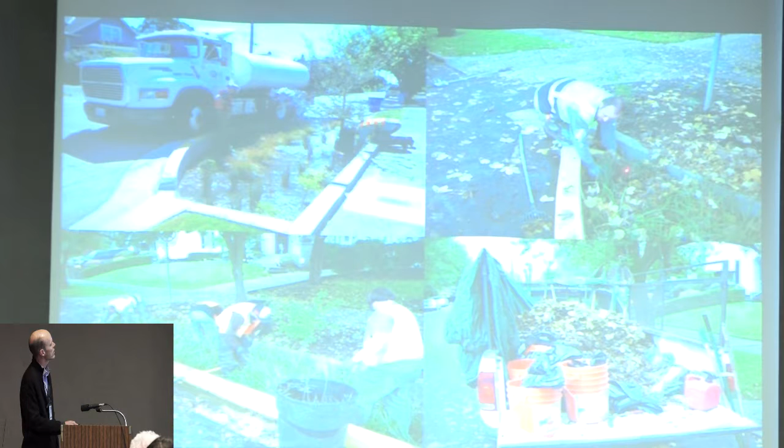Watering can really add up as far as the expense. Here's one of the crews doing standard maintenance, cleaning one of the inlets, and then they're in the facility—here they are hauling the stuff away.

So here are some of the costs. During the first couple of years, the maintenance costs, largely because of the irrigation, are more expensive—$3 to $4 per square foot of facility. And then in the long term, it's more like $1.55 per square foot. Again, these numbers will be adjusted over time as the database gets bigger and better.

It's not cheap, and I think there's much more—our chief engineer has really put the clamps on. We don't do any Green Streets facilities now if we don't absolutely need them for stormwater management. I think initially there was sort of a political push, and people really liked Green Streets, but we really clamped down just because of the long-term maintenance liability that comes with these things.

Green Street Steward Program—I think Pam, you asked me to talk about this. This is really an effort that may, in the long term, help us get residents involved in doing some of the basic maintenance work on Green Streets. It may, in the long term, help reduce maintenance costs, but it's really a pilot project. More than anything, the intent was to get neighbors involved with their Green Streets to make them aware of them.

So we actually had a few people who spent part of their time developing outreach materials and going out and working with people. It's recruiting not just people who live next to the Green Streets to do things like trash removal, but businesses and nonprofits have gotten involved too.

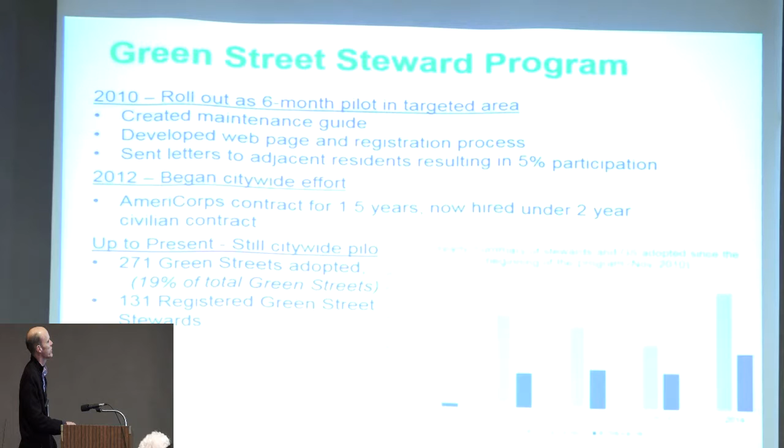Here's some of the folks involved. I think most importantly, we're not asking them to prune or trim. We found out the hard way that if you get people to help you, sometimes they end up pulling out plants that are actually desirable, doing things you don't want.

We don't ask them to plant things—we end up with tomato plants in our facilities, or plants that just don't belong there. And then removing sediment—we had to talk to our city attorneys about that, big questions about it. Although the sediment could be removed and probably go to a Subtitle D facility or a regular municipal dump, we didn't want people handling the sediment, although there was a big controversy about this.

Ultimately we said, no, we have to take responsibility for the sediment, and that makes sense. Sediment that comes out of these facilities goes up to our treatment plant, to a dewatering pad, like any other material we remove from a stormwater inlet or a sedimentation system. We asked them not to do that. But there's still plenty of stuff to do as far as picking up trash.

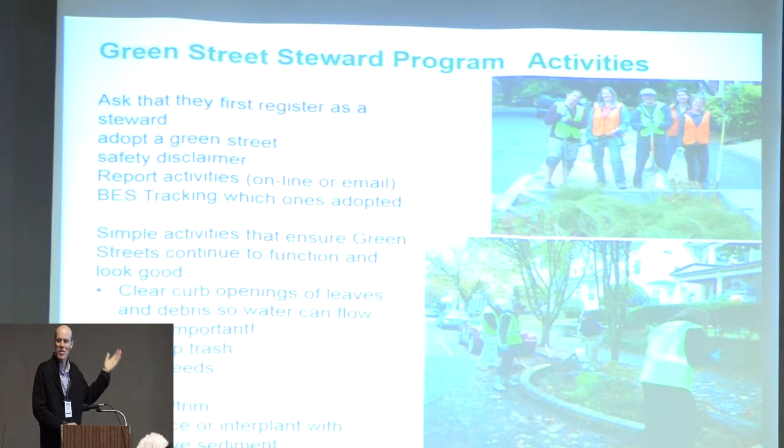I guess we do allow them to pull some of these. And we have a database. People sign up and they're online, and there's various ways that we acknowledge their work. Interestingly, the most active nonprofit group is a group of surfers, of all people, who get out there with groups of young people, have big weekends, and clean green streets.

Obviously, we give them safety vests. We don't want them hurt. Some examples. So I wouldn't characterize it as a huge effort, nonetheless it's useful in a number of ways.

I think we covered most of that. So into the future, I'm getting to the last parts of things. So Pam asked, well, where are you going to go from here? And I'll make this quick.

I think we've realized that we can incorporate — again, I've worked mostly on the ground with ground level facilities — stormwater infiltration facilities on private and public property. I think we've shown that you can incorporate these into the urban environment with good design. Again, it's not just the engineers, these are work teams that have stormwater landscape designers, typically landscape architects, along with engineers and geotechs and all that.

I forgot to mention that in the urban environment, underground utilities are a huge constraint. Spent a lot of time working with utilities — where's the gas line, where's the water main, all that kind of stuff. And it's a big constraint in terms of cost, where you can do these things. But anyway,

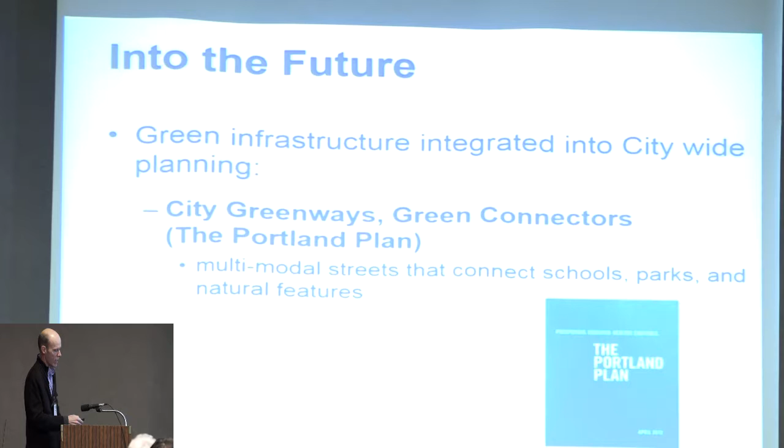there is, I think in the future, we're still committed to this whole idea. There's the idea of creating green corridors — a couple of miles of, say, an important street that is connected by the green areas that have been put in along the street's edge, including green streets — connecting schools with parks, pedestrian corridors that include green areas. Our system planning, the sewer plan and the stormwater plan, used to be separate, and there's a real effort to put those things together, which sounds simple, but it's not. So the green infrastructure would be right in there as far as planning, along with the gray infrastructure.

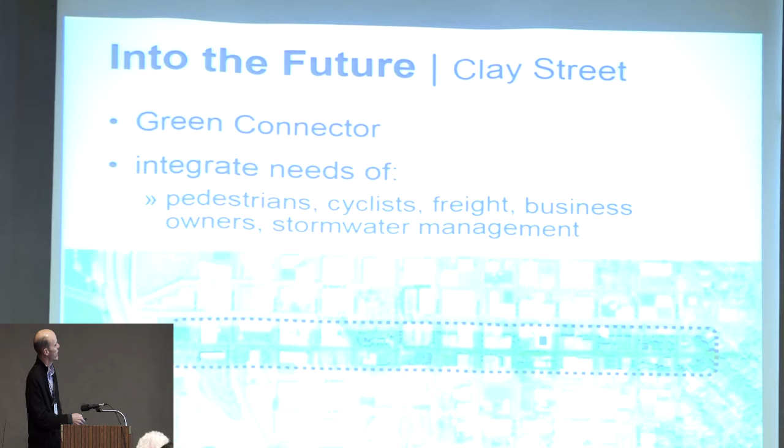Here's an example of a corridor where we've already kind of put all this stuff together, and it's underway. It's that Inner East Side industrial area. An artistic rendering.

And you saw a picture of this, but this gives a good sense again about meeting multiple benefits with these kinds of facilities. Here's a private property facility — this is a swale on a commercial property. Again, combining private and public, doing more of that.

People are also pointing to this stuff for planning for climate change, and I'm not really close to that stuff, but it's part of the whole idea of being resilient to shifts in temperature and rainfall regimes.

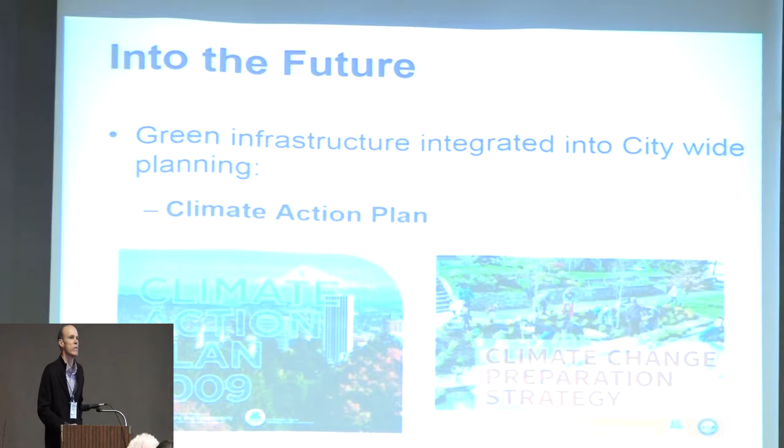There's talk about eco-districts. Again, we've had these areas within the city that have completely redeveloped — multi-block areas — and they're developed sometimes with themes, eco-themes, and just from the get-go, the developers often want to incorporate green roofs, and sometimes we're pushing really hard on them because we have a sewer system that has trouble managing all the new runoff that's going to be coming from it. I think we're going to see more of this stuff in our separated areas, protecting creeks as well.

But it is true, more than 5 years ago we had a plan to put in some green streets in an area served by creeks, a suburban area near where I live, and we had a rejection from the property owners. They didn't want green streets. And one of the pivotal issues is that they had a point.

They said, look, you're going to put in 10 of these green streets on this street, but isn't it true that the catchment area that drains to this creek and is causing problems as far as nutrients and sediment is like 10 times larger than the area you're managing? We had to say yes. It was true. The incremental nature of this whole thing — the residents kind of understood that, and it was a suburban setting, and they really didn't want these things as far as they looked. And I'm talking about green streets. And we backed out of that. We didn't do the project.

So this kind of piecemeal approach in watershed areas served by creeks with separated stormwater systems is still a question mark. And we don't have the same dollars driving those projects as we did for the combined sewer project. I think we will see more of that.

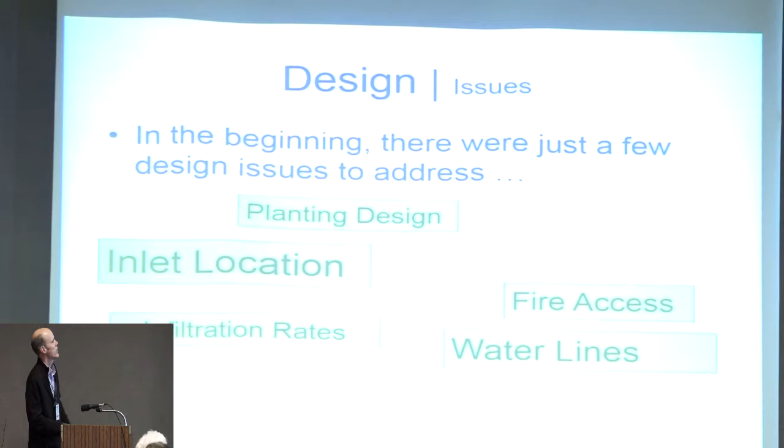Water lines cost us a whole lot of money. I just paid $16,000 to our Water Bureau. They love having the revenue to move a water line so we could put it into a Green Street. Ouch, that hurts. We can't do very much of that. So there's still lots of things to learn.

Still learning about street trees. We actually have a database of the trees we've put into these Green Street facilities. That really hasn't been done before. So we're having to put together a database and look at these trees over time and see how they do. They're being inundated with water on a regular basis. We think we've got it right, but it's a big deal.

We're putting in trees that are in our green streets, and those belong to us. They don't belong to the residents. They're outside the curb, not in the planting strip. Those belong to our utility, so there are really big ramifications to how well those do over time.

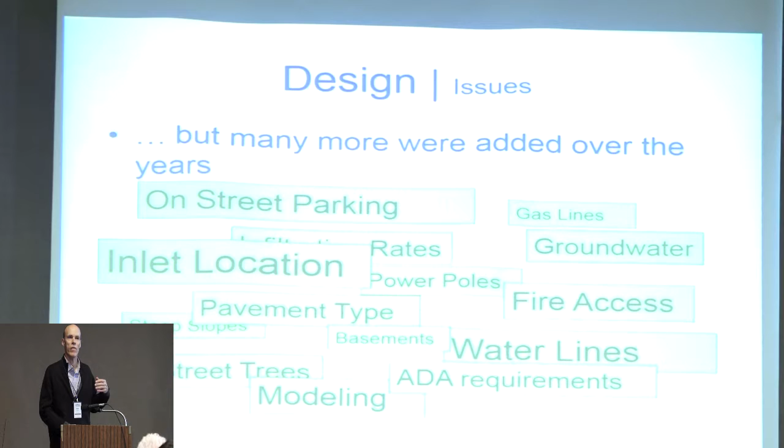I was going to talk a little bit about soils, but we're at 9:30, and maybe I should just go to questions. What would you guys like to do? Hear about the soils? Okay.

So, guys, have a question. Before you were talking about a lot of different things, and I know Portland is pretty big on permaculture. Have you ever incorporated permaculture with any of your urban designs, or has that been asked by the city, or would you even consider it? Well, remind me what permaculture is, so I don't embarrass myself.

It's basically incorporating plants that you can harvest and use and eat in with designs. Oh, I see. There are different communities within Portland that have started incorporating this into their landscapes. I was wondering if maybe it's too in the future for the city. You know, it might be. I don't think it would happen in our green streets or any facilities taking runoff from the surface, from parking lots, because it's just too polluted. But for roof runoff, there are probably people doing it. Roof runoff is generally clean enough for that. So you haven't seen any of the wall type vegetation incorporating that? Not for harvesting. No.

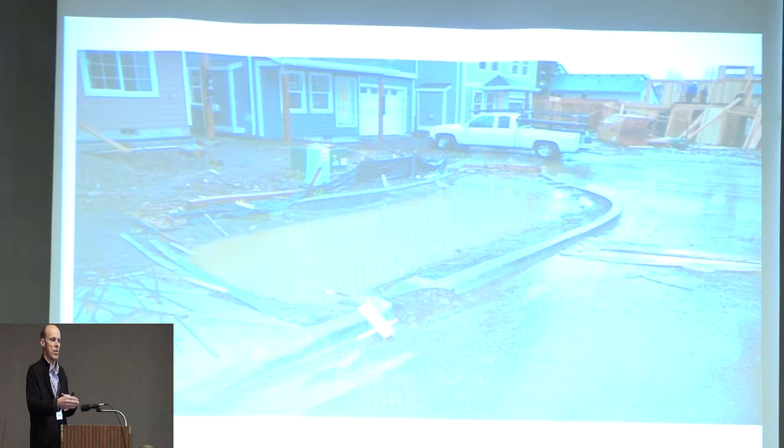Real trouble with developers if they're the ones who built it. It's taken years and years of working with developers to try to get a better understanding of why they need to do this. And the economy is going again - we're going to see a lot more of these built by developers, and they take a lot of attention from our staff working with those developers. So we make sure that at the end of the 2-year warranty period, that startup period, our maintenance people take into the city's possession a facility that is in really good shape. The plants are healthy, the plants have been watered, the system infiltrates well. Anyway, that's a whole topic.

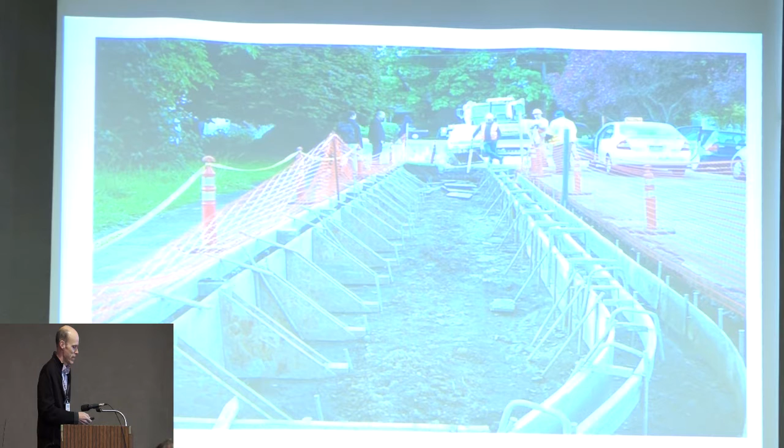I forgot I threw this in - this is sort of the very end of the presentation, if I had time kind of thing. This is what construction looks like for a green street. It's a little odd - that's a porous pavement system on the right, one of the few that we actually have, but I thought you might be interested in seeing what the formwork looks like. What typically happens: they put in the formwork, pour the walls, they've tromped on the soil in the middle, and this is going to be an infiltration facility. So they pour the walls, take the forms off, and only then dig down to the final excavated elevation of the facility and kind of fluff that soil up. Because we found out the hard way, if your initial excavation goes to the final depth of the thing, you really hammer those soils, and it's not going to infiltrate very well, even if you bring in a layer of sandy soil on top of that. A lot of work with the contracting community to get them to understand that.

Whoops, I guess that's the end of it. We're about 9:39, so maybe we'll just open it up. Questions?

Do you regulate every development no matter what the area is, or do you have a minimum area? Yeah, we do. I think we have one of the most conservative trigger areas. It's 500 square feet of new or redeveloped area, and that applies to our city bureaus as well, if the water bureau goes out and digs a water line. I think in Seattle it's 5,000 square feet. We're really conservative, and it's a significant issue.

You talk about monitoring, or what you have learned with respect to the infiltration impact on the structures of the streets and areas where you have utility systems? Yeah, I think the story's pretty short. I think there was concern by the chief engineer in the Water Bureau early on about undermining or adversely affecting the subgrade for streets. There was a little bit of testing done early on to look at moisture levels under the streets adjacent to Green Street facilities, and ultimately the decision was made that there's no additional monitoring being done.